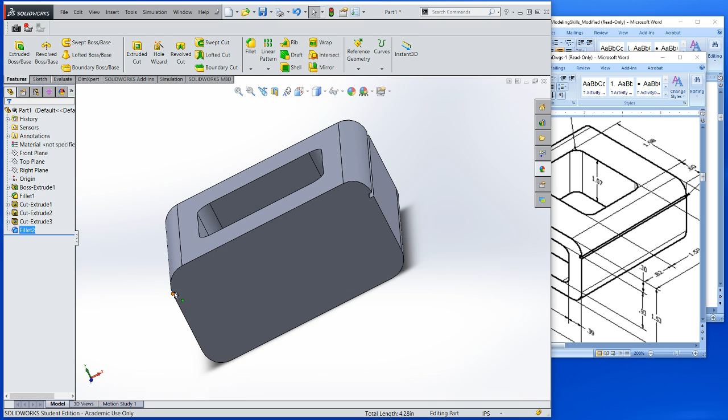So we left off, we'd had the body made, and we've basically extruded the body, done our edge cuts, and our passenger compartment cuts. Let's do the end cuts. They're different, so we're going to start on this end. I'm going to start by doing an extruded cut and applying it to that surface.

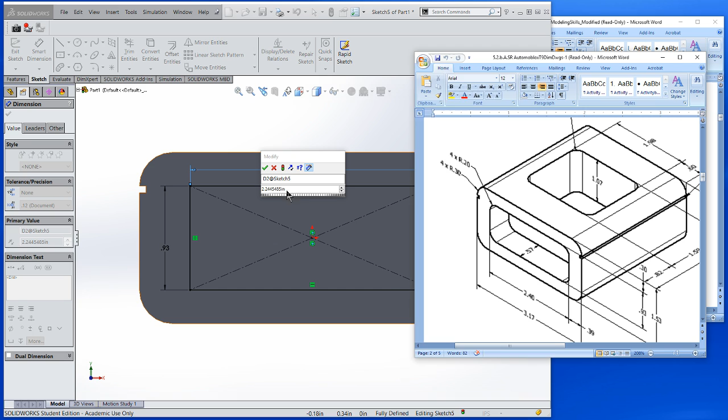You'll see it's 2.4 by 0.93 tall. I'll use a center rectangle. It's 0.93 and 2.4. You'll see that that fully defines it because I started out coincident with my origin where I started the part. Depth on this is going to be 0.57. That is my cut. Accept it.

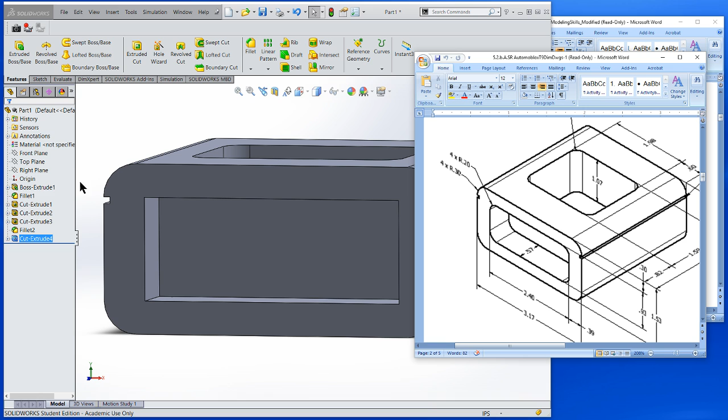And I'll apply that 0.2 radius fillet on the inside edge. Fillet, 0.2 radius, and I'll choose that corner, corner, corner, corner. Set my fillet.

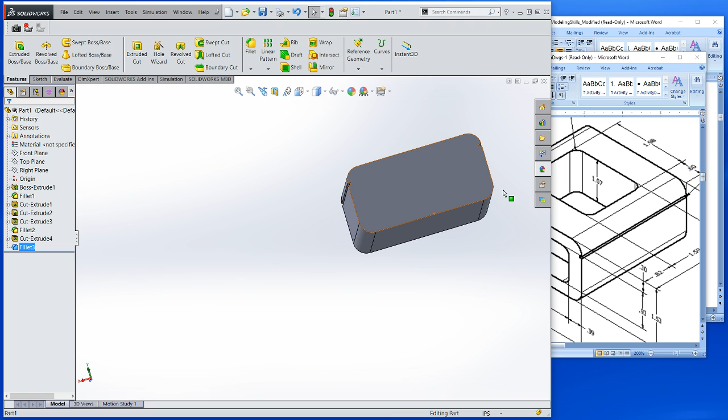Now I can flip the model over to the other side, and I'm going to do the same basic thing, but it's important that you look at the instructions here, because this side's hole is not the same size. This is going to be 2.5 wide, 1 tall, 0.27 from the top, 0.34 from the right side, 0.57 deep.

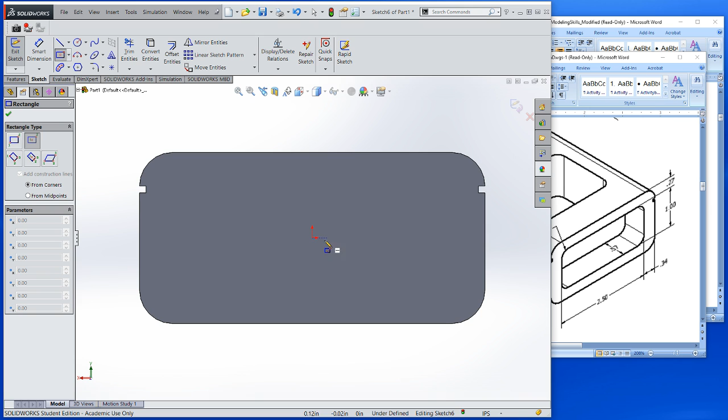So let's start with an extruded cut. Again, I'll use a center rectangle. And I'm going to go 1 inch tall, 2.5 wide. Becomes fully defined at that point.

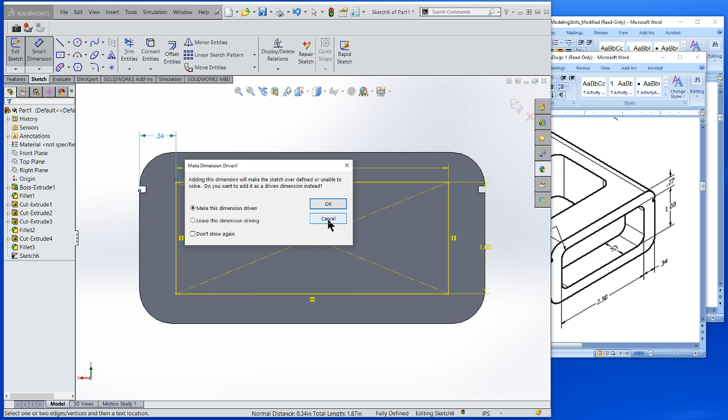If I take this measurement, it's going to be a driven dimension, but let's just do this for grins, and you'll see that I'm 0.34. So I don't really need that dimension. Similarly, if I measure down here, you'll see that I have that model dimension of 0.27 that's shown over here. But I don't need to do that because I've associated with the center. That's why I did that center rectangle, to make the basis of the original part.

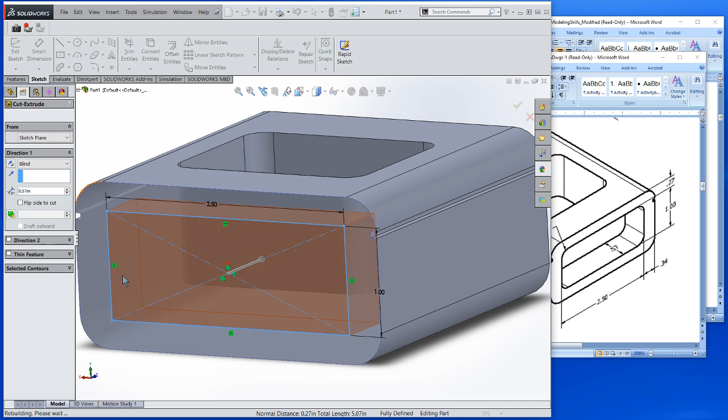Okay, exit my sketch, and I'm going to extrude this again to 0.57 inches in blind. Accept it. Apply my fillets to all my interior corners. Corner, corner, corner, corner. Accept my fillets, and I've pretty much got my completed part.

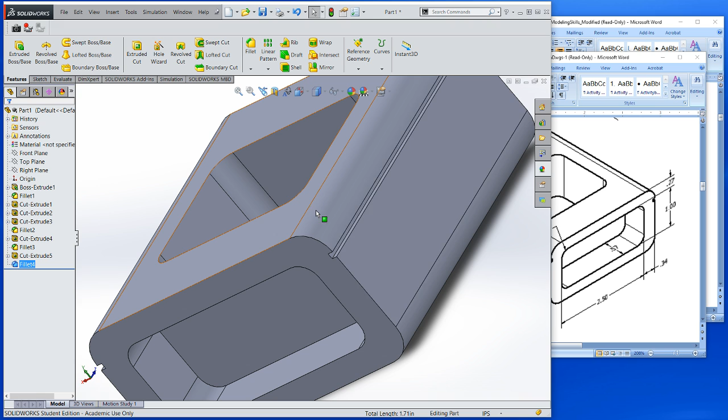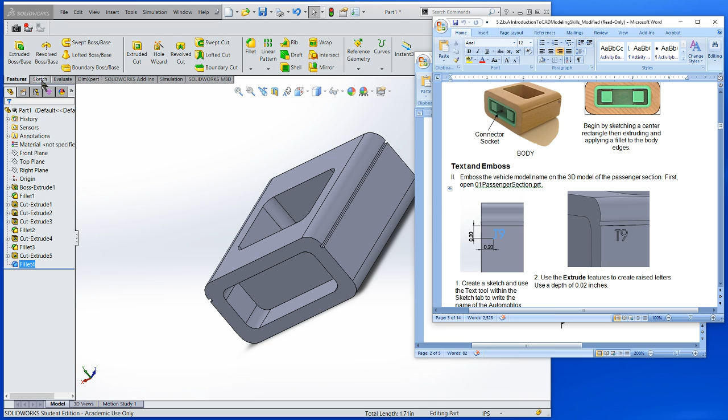So next up in our instructions, what it asks us to do is to go ahead and emboss a name on the side and a T9, and this is just basically another sketch. So what I'm going to do is go over here and I am going to choose an extruded boss base and choose this face. But instead I'm going to select the letter symbol here, the letter A.

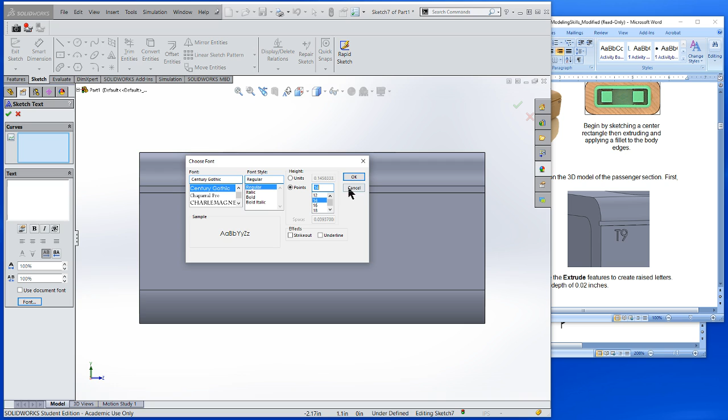Comes up with a dialog box right down here, and I'm going to choose a font. My font, Century Gothic, 14 points. Okay, type my text in. I'm just going to go capital T9. Accept it. This point is the point of insertion in the model.

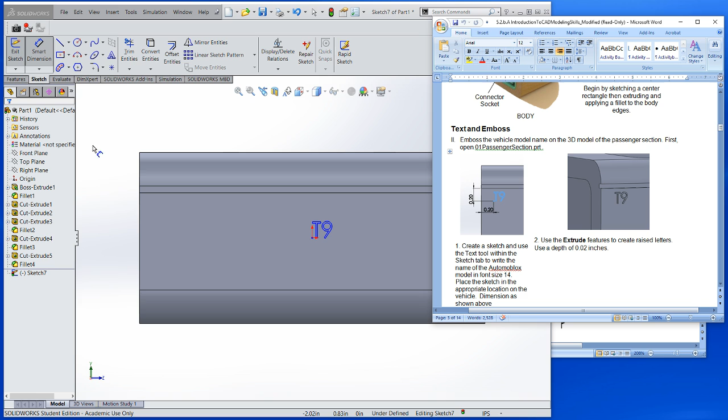So I'm going to go ahead and dimension this per my instructions: 0.2 down from this upper lip and 0.2 in from the edge. So we start from the edge to my dot, 0.2, and from this line down, 0.2. Nicely positioned, looks attractive. Exit my sketch.

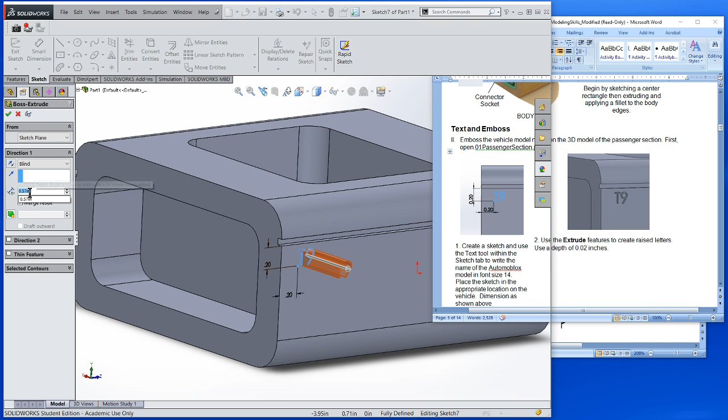Now, per my instructions, I only want to extrude this out 0.02 inches. So there it is. Let's go 0.02 and accept it. So what that effectively does is makes a raised letter right there.

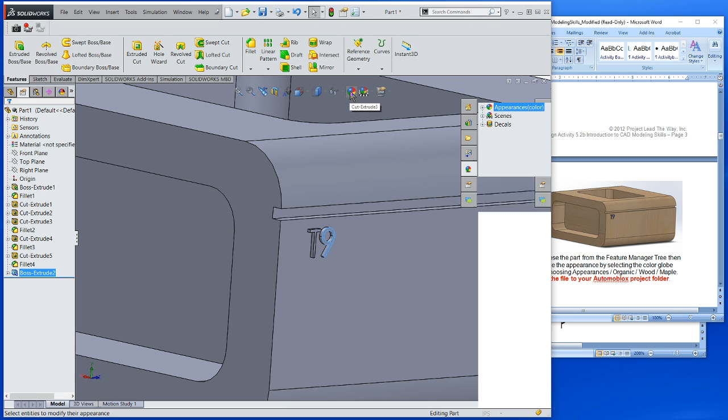The last thing we really want to do is to color our model. So I'm going to paint this surface. Hit the escape key. To do that, I'm going to select the surface, click on my globe, and I'm going to choose a color. Accept that, and I'm going to choose my next surface here. It's easier if I zoom in. Similarly, paint it, and there's my color.

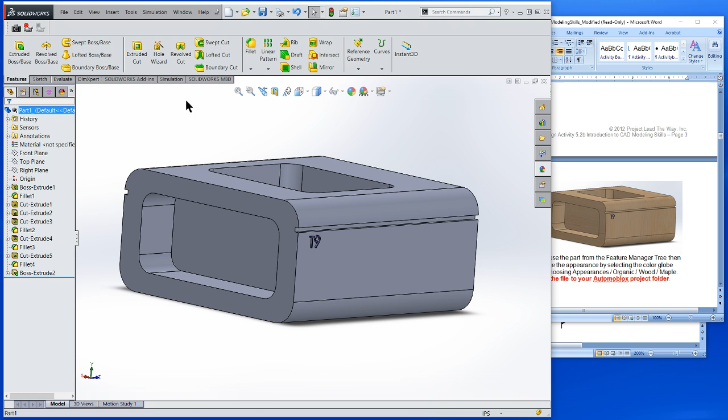All right, the last thing I want to do is change the appearance of the overall model. So to do that, I'm going to choose my model, my part, and I'm going to color the entire thing with the globe, except this time I'm going to choose a fairly bright green. I like that. And I'm coloring the entire part, you'll see here, part 1. Oop, sorry, that's not what I wanted to do.

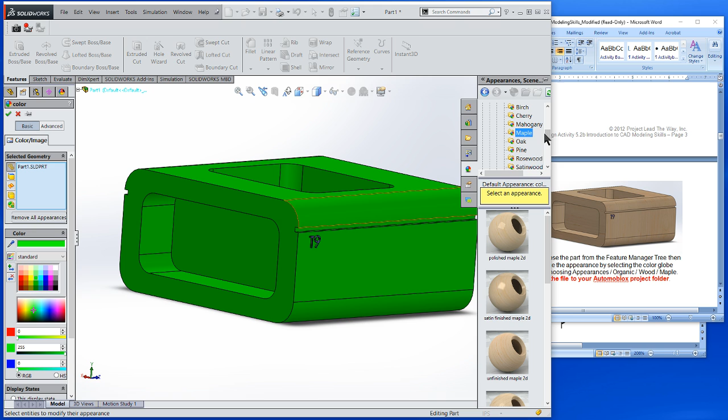I wanted to change my appearance over here, and I'm going to choose an organic material, which is going to be wood, maple, and if I pop this out, you'll see that I can go maple, and now I can choose one of the maples. I like this polished maple end grain. That looks pretty.

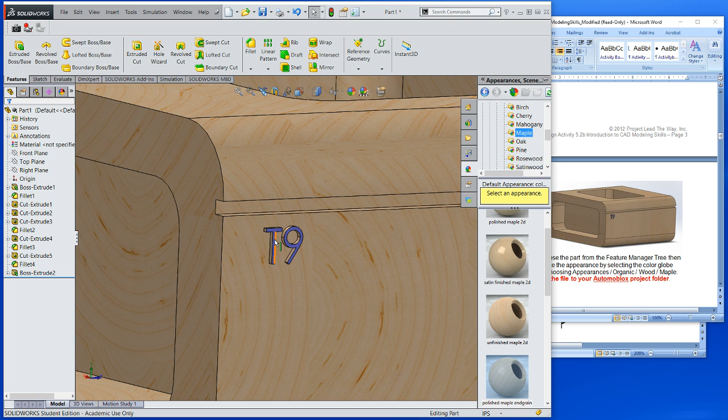That colored my entire model. So now you can see that I've applied a color here, a little purple looking color, and I got a nice maple grain.